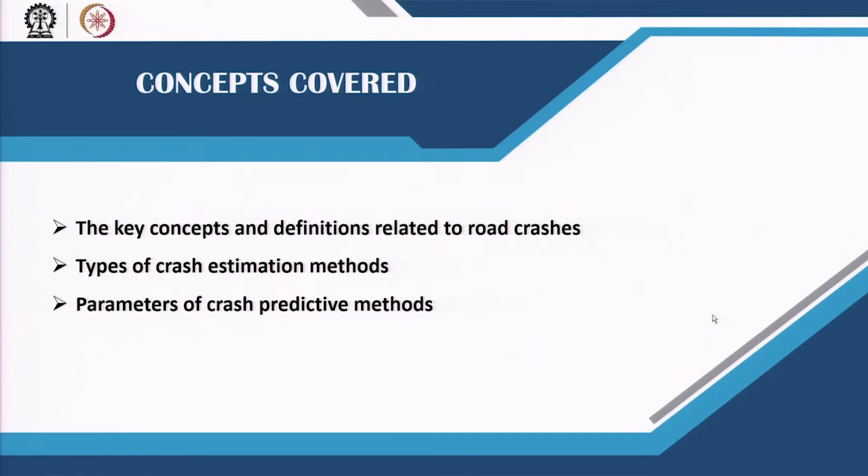Welcome back, friends. Now that we have introduced you to safety and pedestrian safety in particular, in this lecture what we are going to expose you to are the different estimation methods of road crashes in general. Then we will subsequently look at specifically pedestrian and bicycle crashes. But you have to first understand the concepts and definitions related to road crashes, how they are estimated, and what are the parameters involved in these estimation methods.

So, you would now notice that in most of the transportation safety literature, we are using the word crash rather than accident, because more and more research is showing that all of these accidents may not be an accident. For example, the meaning of the word accident in English means that it happened suddenly or without anybody's or anything's intervention. But what we are noticing is that many of these accidents can be predicted, and if they can be predicted, that means they can be avoided or stopped as well. So, hence this word crash seems to be a better fit.

So, when we say crash, what we mean is a set of events that result in injury or property damage due to collision of at least one motorized vehicle, and may involve collision with another motorized vehicle, a bicyclist, a pedestrian, or an object. Okay. So, a crash in totality does not always necessarily lead to a fatality or a death. It may be just a property damage kind of crash. It may involve multiple vehicles or just one vehicle crashing with an object on the road, or it may be a vehicle crashing with either a pedestrian or a bicyclist. So, everything inclusive of all of these terminologies is what is a crash.

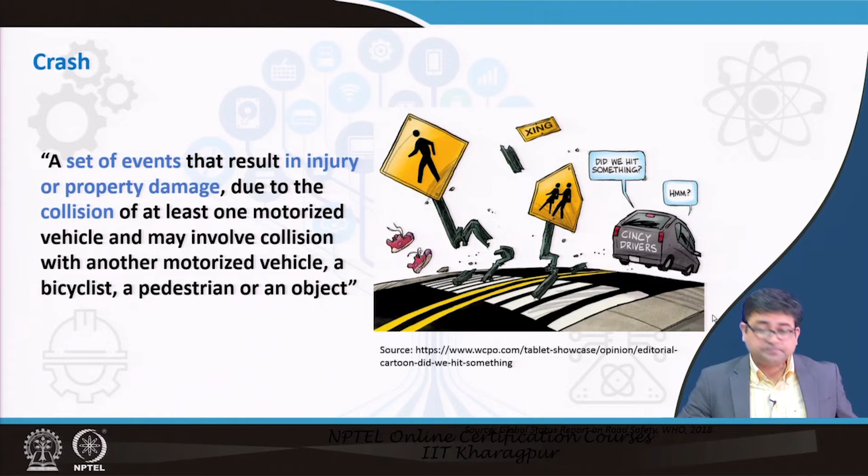So, when we want to estimate a crash, one way to know about a crash or an accident is after the fact that the accident happens. Now, that is a very reactive way of understanding or knowing where the crash has happened. But if you had to predict a crash, or estimate that this roadway is likely to have n number of crashes in the next month or in the next year, then it's almost a proactive measure, and you can then make some interventions so that these crashes can be prevented. So, that is why it is very important in today's transportation arena to estimate the crashes.

So, when we say estimate of crashes, what we are usually trying to do is develop different methodologies to predict crash frequency, how frequently a crash can occur. So, it can be on an existing roadway for existing conditions during the past or in the future. So, if you already have data about the number of accidents or crashes in the past, then for that particular type of roadway, you can say, for example, on state highways in such and such state and in this district there were n number of crashes per year. So, that is kind of a crash frequency. It is a very easy to understand, simple terminology of what a crash frequency is in the past. But can you use the same trend and predict that the crash frequency will be the same in the future or not? That is something we will tell you how to do.

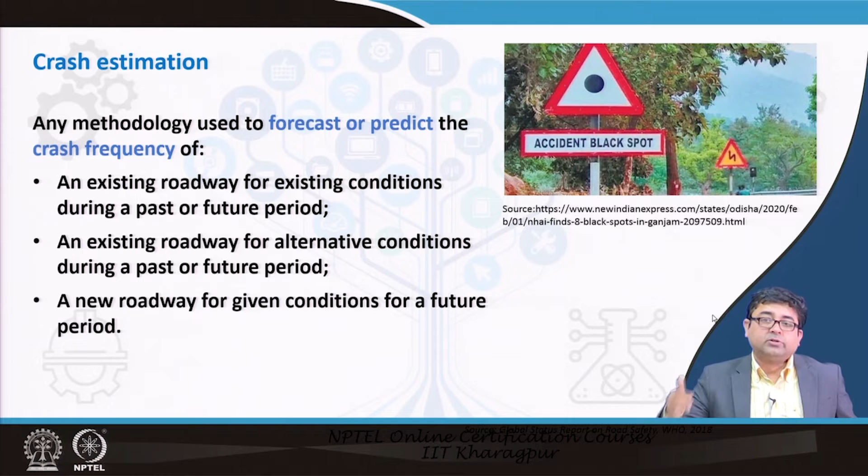Okay. So, it can be for an existing roadway, it can be for an existing roadway for alternative conditions. Maybe different conditions cause different crash frequencies, or it could be for a totally new roadway as well. A new roadway is being built between 2 points. So, what is the probability or prediction of how many crashes will occur there or how frequently they will occur? That is also something that has to be taken into account. This is the best time to take into account the crash frequencies for a new roadway, because vehicles have not yet started plying on that roadway, so that you can incorporate safety measures proactively so as to reduce the probability of those crashes happening.

Now, what are the different contributing factors when it comes to crashes? What you will see in this picture on the right hand side is the three different types of factors that we group them under. One are the roadway factors, the other are the vehicle factors, and then there are driver factors. This is a little bit of an old data set, and these percentages may differ as we are improving our research day by day, but overall what we have seen is the crashes may occur due to different driver related factors, different roadway related factors, and different vehicle related factors.

So, driver related or human factors include age, judgment, driver skill, attention, fatigue, whereas vehicle related factors include the design of the vehicle, the maintenance of the vehicle, the manufacturer, what type of vehicle it is. And the roadway or the environment include the geometric alignment, cross section, traffic control devices, meaning signalized or unsignalized intersections, the surface friction, grade, weather, visibility and all. So, these are broadly all of the different types of factors that contribute to crashes on a facility, on a highway or an urban road.

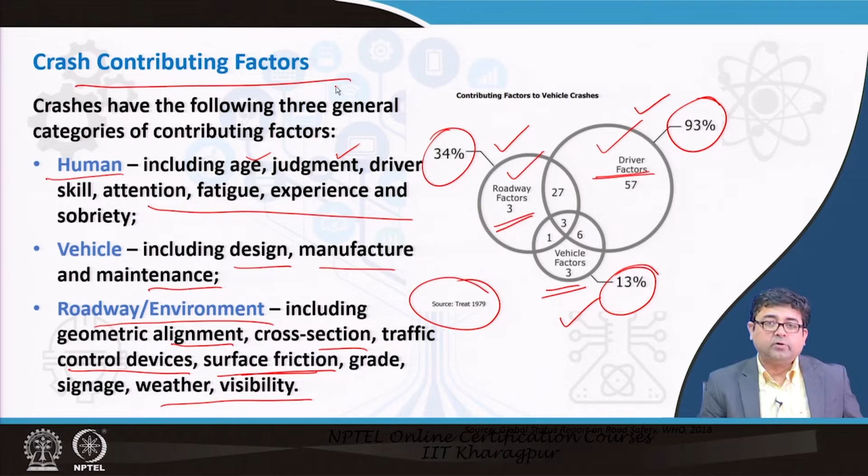The other important thing to understand is this whole idea of objective and subjective safety. Objectively is something that can be quantified. So, when we look at objective safety, essentially what we are trying to do is find out what is the number of crashes or the crash frequency and how can we reduce that. Whereas, there is a totally different arena of what is called subjective safety. That is the perception of how a person feels safe on the transportation system. This may vary based on the different types of users, vary from location to location, but nonetheless is becoming a very important aspect when we talk about transportation safety.

For example, if you do a physical improvement on a roadway, what do you expect? You expect that because of that improvement, your crashes were maybe here and it has now led to fewer number of crashes. It has gone from here to here, and also at the same time the subjective safety. So, people were feeling less safe here, now they are feeling more safe. So, when you take a physical measure to improve safety, it should affect both the objective safety as well as the subjective safety.

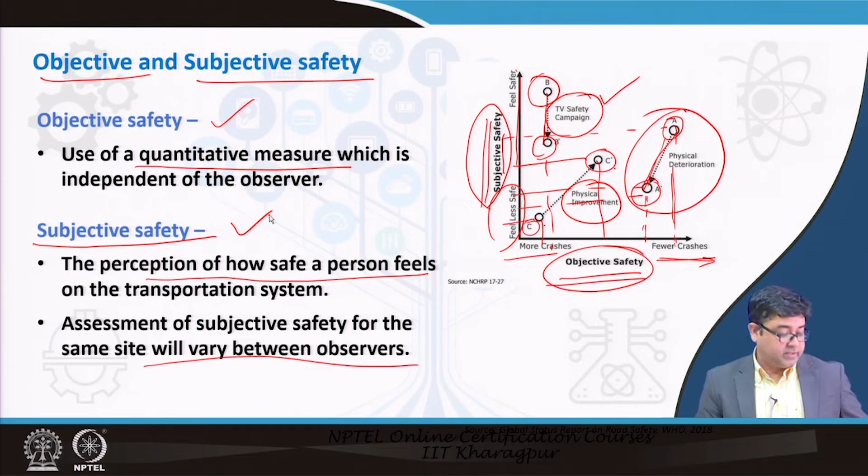So, different measures give different types of objective and subjective safety implications. So, you have to not only look at the objective safety, but at the same time you have to look at the subjective safety of your highway or facility in your area.

Then different descriptive measures have been developed over the years, which give you an idea about the number of crashes or the frequency of crashes that are happening. For example, you may decide that you want to know the number of accidents as a result of the different types of intersections in your area. It may be at a mid block intersection, a Y intersection, a T intersection, a roundabout, a 4-legged or even 5-legged junction. So, you can divide it up in that way and understand the safety implications at different types of intersections in your city.

So, the different parameters that are involved in understanding road safety may include just purely the number of people that have died at each of these, or the percentage of deaths, or the number of injuries. Remember, all crashes do not lead to death. There may be a lot of crashes that lead to minor injuries, major injuries, and then maybe they lead to death. Okay. So, you may want to know either the total number or the percentage, or just the total number of crashes, or you want to divide it up into different types of injuries, minor injury, mean of the injuries or mean of the deaths.

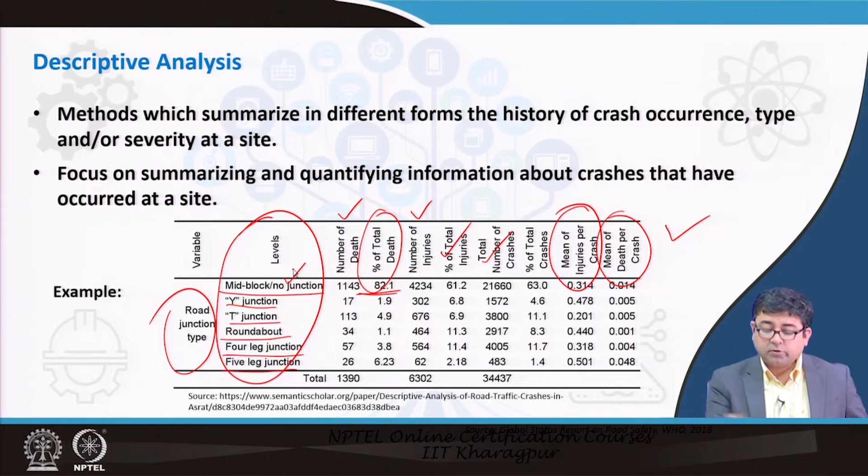These are all done so that the measure that you implement to improve it should be very, very specific. So, in this type of situation, possibly the mid block section is the most vulnerable section. So, you have to improve the safety of the pedestrians crossing at mid block, for example. So, what type of intervention do you put? You should not go for an intervention that is more effective at a signalized intersection; you have to think of something that is more practical for a mid block section. So, that is the reason why you develop all different types of descriptive statistics.

You also have to know quantitatively how well to predict, right. Prediction always has a lot of errors. When you are trying to predict anything, you need essentially a lot of input values. The better and more precise the input values, the better will be your prediction. So, a system that we are moving towards is to capture all incidents or all crashes that happen at a roadway and write down the parameters then and there.

So, when an accident happens, not only the police arrives, maybe the ambulance arrives at that spot. We are also trying to have an engineer arrive at the spot along with them, so that the engineer can help point out some deficiencies in the roadway design or the intersection design or whatever it is, so that all the parameters are captured at the time of the crash. By collecting all those parameters, you can hope to develop a predictive model which will give you better results. So, it is very, very important for us to do such accident investigation right at the spot, with different types of people there: not only the ambulance, not only the police, but also engineers on the spot, so that they can verify the different parameters that were involved in that particular crash.

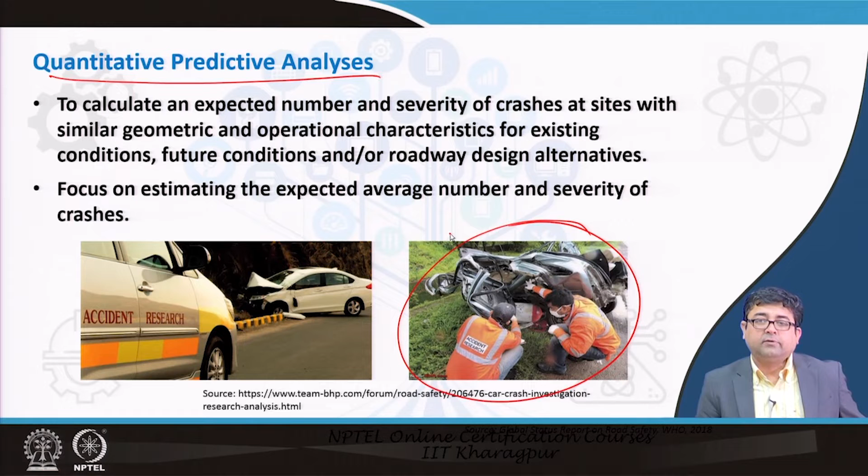Now, how have the different crash estimation methods evolved? We have already talked about crash frequency. The other thing that people now look at rather than just crash frequency is something called a crash rate, which tells you how many crashes are happening per n number of miles of vehicles driven on that road. The point is, the more vehicles, the higher the likelihood that the number of crashes will increase. So, it is not just how many accidents are happening per year or per month, it is also how many vehicles are being driven on that road. That is what is called crash rate.

And then there are of course a lot of indirect safety measures known as surrogate measures that have been developed. Surrogate measures mean, for example, if you do not wear a helmet on a two-wheeler, you are more likely to be involved in an injury or fatality related crash. So, now people are trying to relate wearing a helmet, or wearing a seat belt when you are in a car, to the probability of you being involved in a major crash or a major injury crash.

Different types of crashes can be categorized. When you do not have good information or direct, first-hand data on accidents for a roadway segment, what you usually do is try to predict an accident using different types of indirect measures. These indirect measures are called surrogate measures.

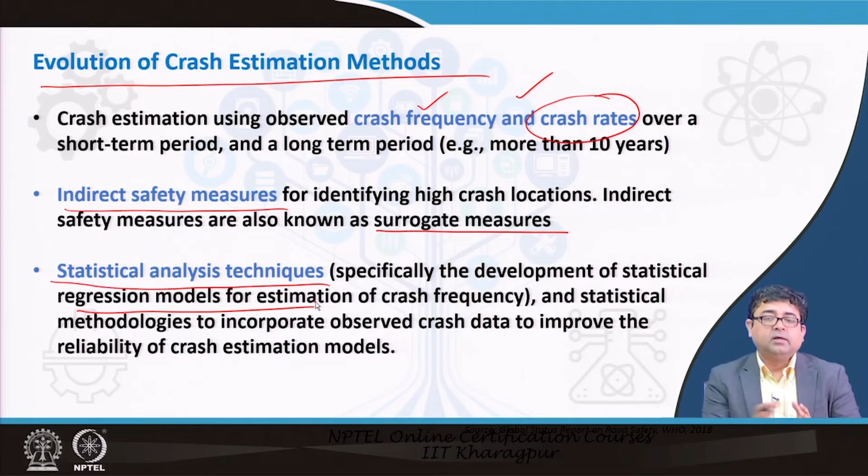Then there are statistical techniques which look at what is the best model that fits the existing number of accidents. Usually people see whether regression models can estimate crash frequency, or whether Poisson models or negative binomial models fit the crash frequency that is happening. Those are all statistical tools, and if the model fit is very good, they can also help in predicting future crashes.

Crash frequency or crash rates are often used for crash estimation and evaluation. They are very simplistic. For example, you may often see such statistics in newspapers, digital media, or on TV, showing the number of accidents that have happened per city per year and how they rank.

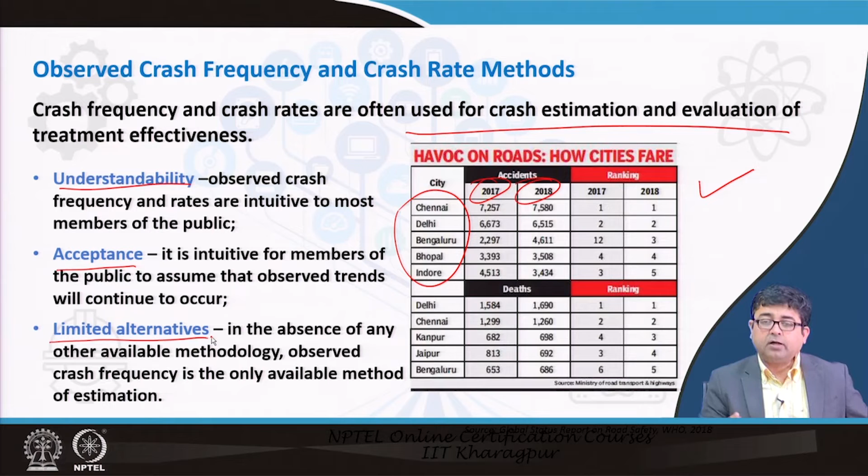These are easy to understand, and since these crashes have already happened, the validity and acceptance of these numbers is high. People do believe in these numbers, but it does not provide a means of predicting crashes. It is just a very reactive method, knowing about the crash after it has happened. That is a very old way of trying to deal with reducing the number of crashes. It does not give you alternatives or different methods of prediction.

If you look at each of these methods, crash frequency is simply the number of crashes divided by the period, in years or months or whatever you are looking at. Crash rate is a better measure than crash frequency. It expresses crashes per 100 million vehicle miles traveled. The more vehicle miles (VMT or VKT) traveled on the road, the higher the number of crashes is likely to be. So you take the number of crashes times 100 million, divided by the volume on that road, the number of years, and the total length of the segment you are looking at. That is essentially how you determine the crash rate.

Consider a simple problem: road segment A is a 3-mile section with 4 crashes over 5 years and a traffic volume of 4,000 vehicles per day. Segment B is also a 3-mile section, but has had 10 crashes over 5 years and a traffic volume of 12,000 vehicles per day. If you determine crash frequency and crash rate, which is the worse segment and which is the better one? You want to compare these two segments to see which is worse, and then prioritize. Usually you want to help both segments, but if you must prioritize, you would pick which one to improve.

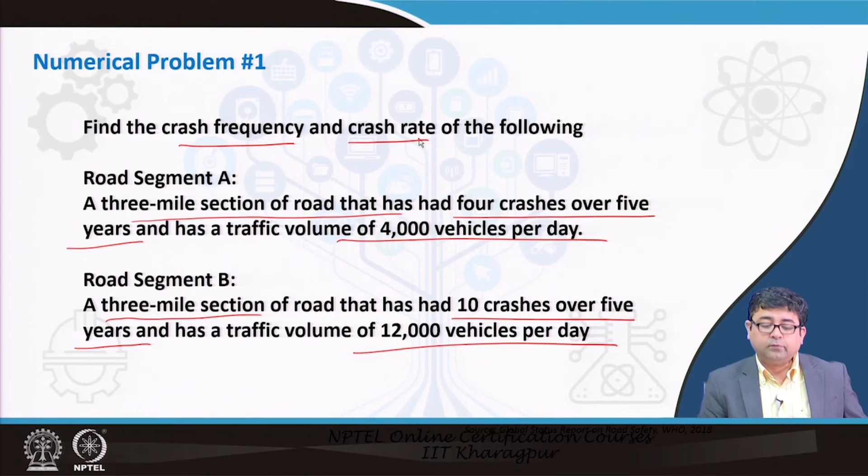If you purely looked at crash frequency, segment A has 4 crashes in 5 years, giving 0.8, whereas segment B has 10 crashes in 5 years, giving 2. So you would think segment B is the worse segment.

However, if you look at the crash rate, which depends on how many vehicles travel on that road, segment A has a crash rate of 18.2 crashes per 100 million vehicle miles traveled, whereas segment B has only 15.2 per 100 million vehicle miles traveled. This suggests segment A is actually the more serious situation and needs more focus, because its crash rate is higher even though its crash frequency is lower. That's why more and more people are looking at crash rates rather than just crash frequency.

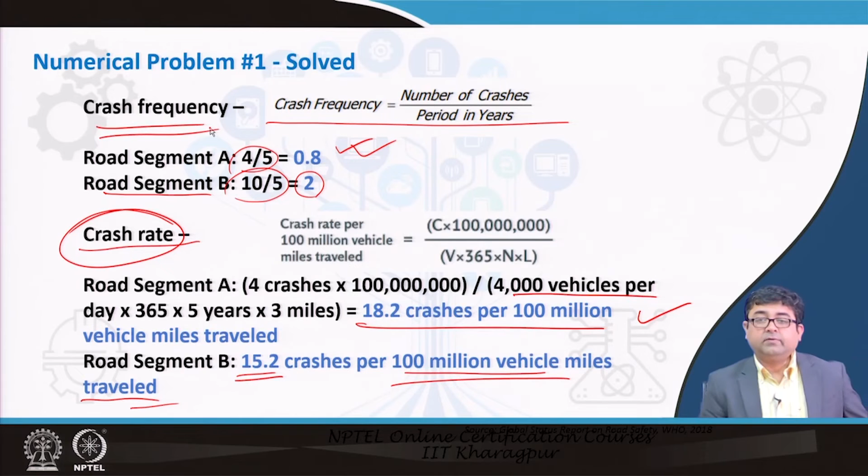What are the indirect means of understanding safety? Like we said, the surrogate methodology is used primarily because maybe a road or facility is not yet in service, so it is a road that is just being built. So you do not have any previous data on the road. So how can you predict what the crashes will be on that road, or it has been only just opened for the last few months or weeks. So you do not have a lot of data on it. So how can you then predict, or maybe crash frequencies are low. Frequencies are low, however, people are complaining that there are a lot of accidents leading to fatalities maybe. So you do not know how to deal with it.

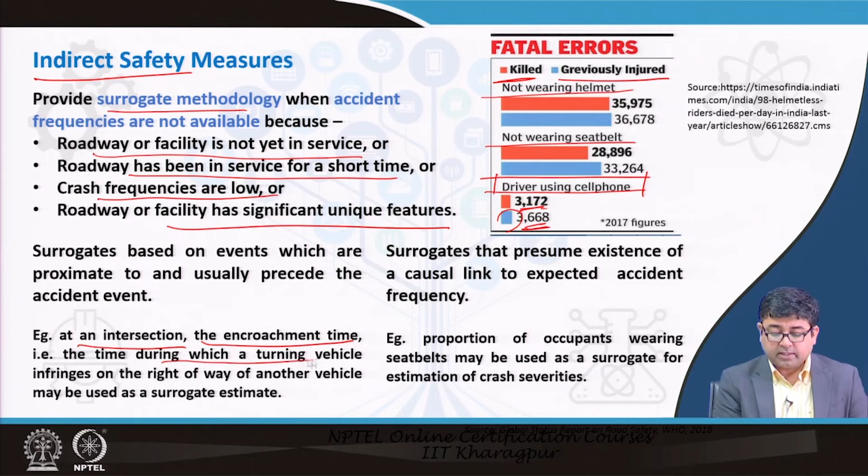For example, at an intersection, the encroachment time, that is the time during which a turning vehicle infringes on the right of way of another vehicle, can be used as a surrogate estimate. For example, if you have free left turns at many intersections.

So the free left turn time and the through vehicle is coming on the main road, there is a possibility that these two vehicles may collide. Or during the free left turn maybe a pedestrian is trying to cross that road, so they may interact or collide with each other. So the encroachment time may be seen as a surrogate measure for safety at an intersection, and we have already talked about wearing seat belts or not wearing helmets being a surrogate measure.

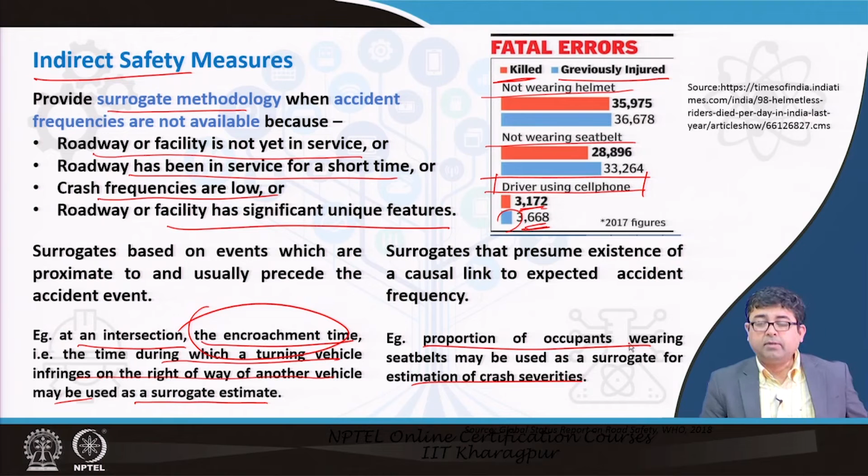When we start looking at the statistical method, we have already told you that these may be either simple regression equations, or they may also be Poisson or negative binomial.

People tend to look at negative binomial and Poisson because usually when we look at the number of crashes that happen on one roadway, for example over a year or two years, they are usually termed as rare events. I mean, rare events as in you would see a lot of accidents happening, but in terms of count, if you count each crash as an event, over 365 days you may find only 50 accidents have happened. So 50 out of 365 days seems like a rare event. That is why some researchers are modeling crashes as rare events.

However, it is imperative that these statistical models have a good fit, otherwise they may not be able to predict future crashes very accurately, and calibration to local data is very important. So once you have your statistical model, you have to calibrate it, because maybe the model was developed in another city, another town, another country. You have to calibrate it to local conditions, then validate it with the actual number of accidents that have happened. Only then can statistical models be used with confidence.

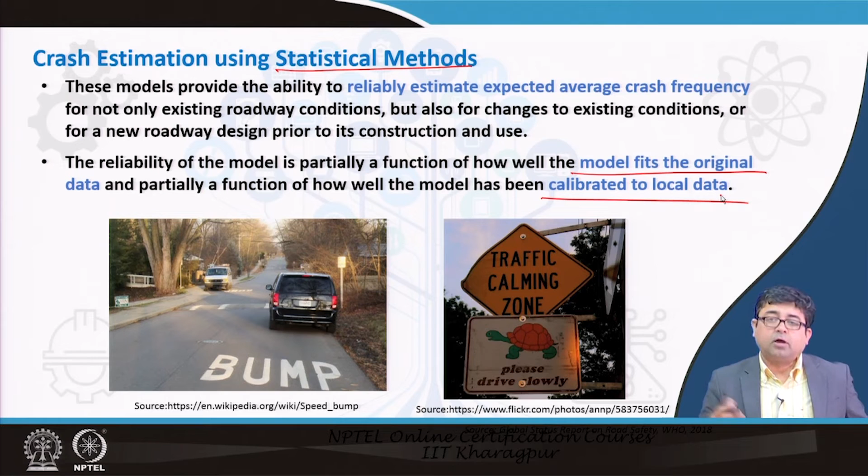So, in these predictive models, what people use in general are what are called safety performance functions.

If you are really a person working in the transportation safety arena, then you will be dealing with a lot of these safety performance functions, or SPFs. These are statistical base models used to estimate average crash frequency for a particular facility with specified base conditions. These are equations, most likely regression equations, sometimes exponential equations, that have been developed for a certain base condition. If you take that to another condition, you have to calibrate it to those conditions and then use it to predict. So, these are what safety performance functions are.

Accident modification factors, or AMFs, are the ratio of the effectiveness of one condition in comparison to another condition. So now you have developed a countermeasure, maybe implemented a countermeasure to improve safety. What is the modification factor as a result of implementing that safety measure? Maybe you have increased police patrolling. As a result of increased police patrolling on that roadway, how have accidents changed? The ratio of before and after gives you the actual modification factor. Then somebody else in some other neighborhood or city can also think that if I have more police patrolling this roadway, maybe my accidents will also go down. So, those are called accident modification factors.

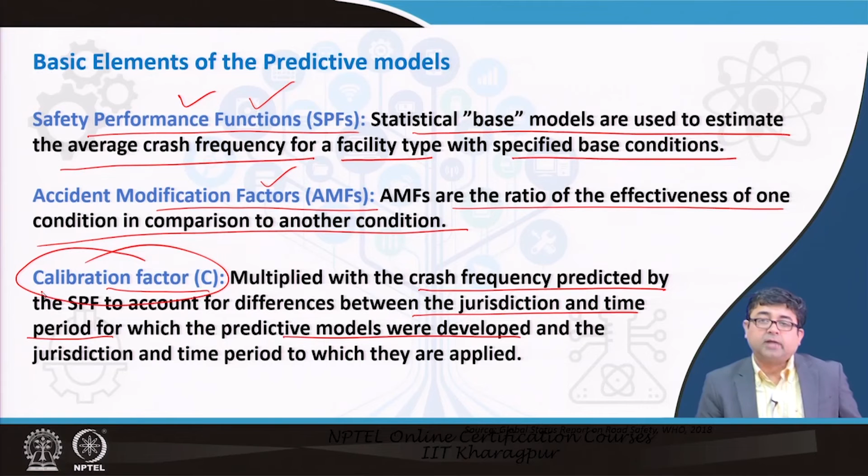Finally, the calibration factors are multiplied with the crash frequency predicted by the SPF to account for differences between the jurisdiction and the time period for which they were developed. Maybe this was developed 5 years ago for a different city, however now you want to use it 5 years later for a different city. So you have to calibrate it to your area, to your time period. All those calibrations are involved in this.

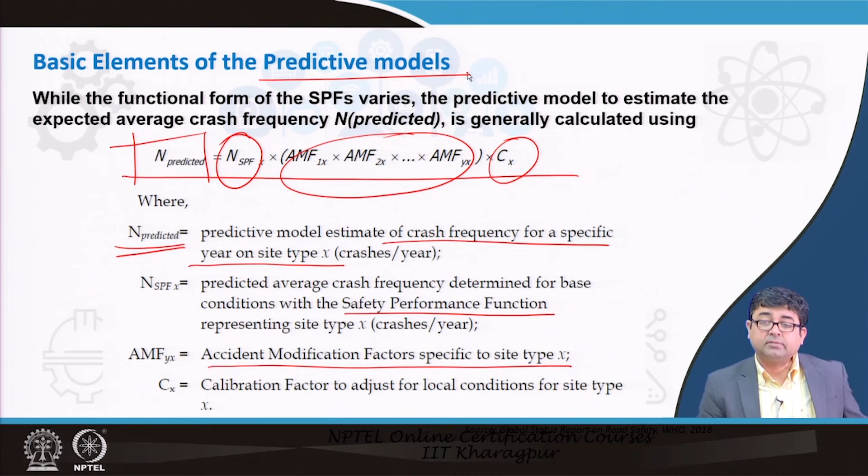Usually, this is how you will see a predictive statistical model. So, n predicted, or the crash frequency for a specific year on a specific facility type, will be given by your SPF function, safety performance function, which is then multiplied by your accident modification factors and also your calibration factor. This is a basic gross level model. If you are trying to develop a predictive model for your area, it will have all of these elements, but different factors will apply for your case. The value of calibration may be less or may be high. But basically, this is how your model should look like.

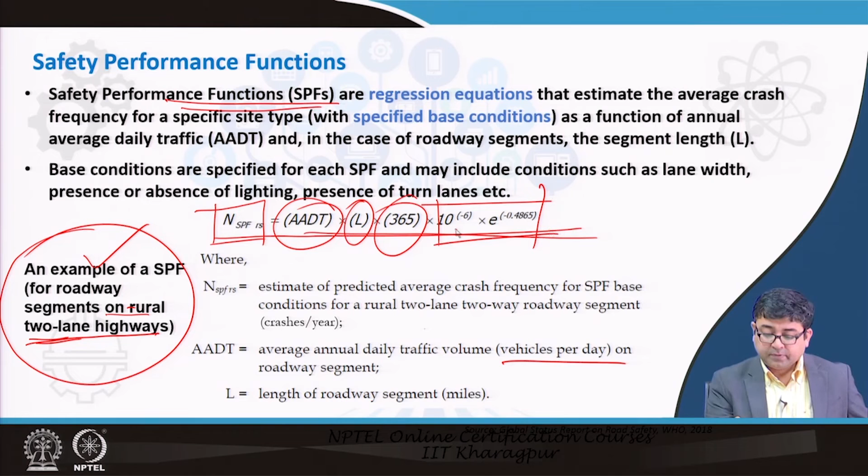If you are looking at developing these safety performance functions, they will look something like this. For example, a safety performance function for a roadway segment on rural 2-lane highways. This is as specific as that - it has to be for a particular type of facility. So if you have to develop an SPF for a 2-lane rural highway, maybe this will look like this. It has the vehicles per day, AADT, your length of stretch, for all 365 days, and these have been developed based on all the data that has been collected. It looks like some form of an exponential function that you are using to predict the average crash frequency for the base conditions - this is for base conditions for rural 2-lane roadways.

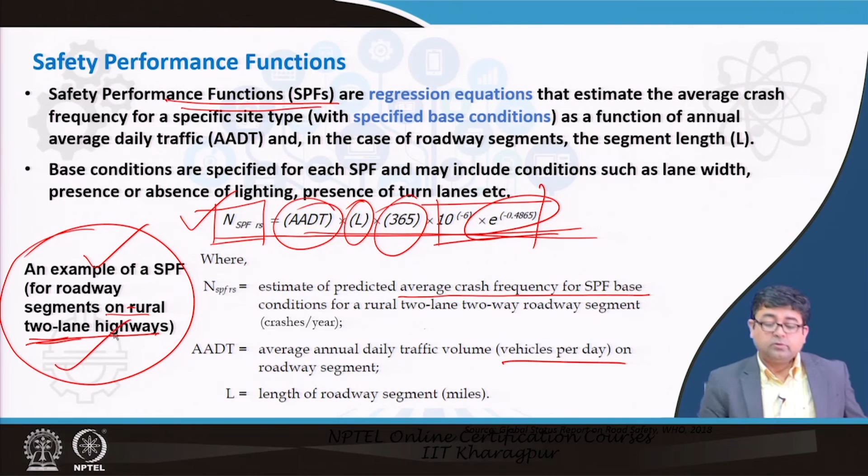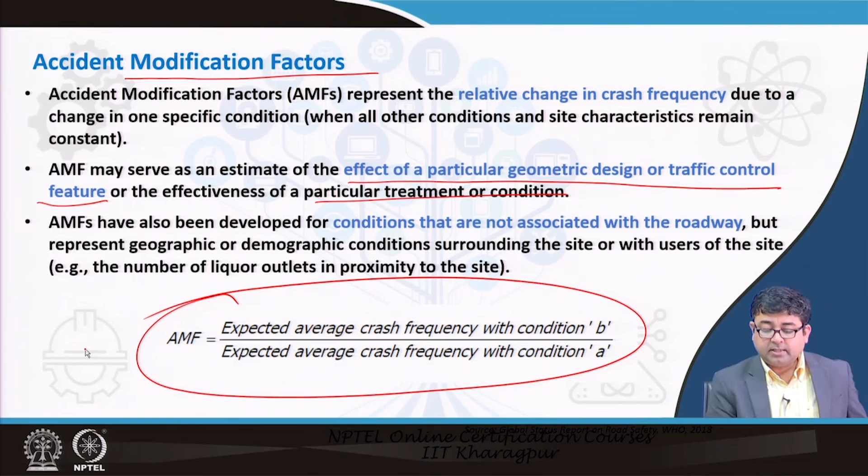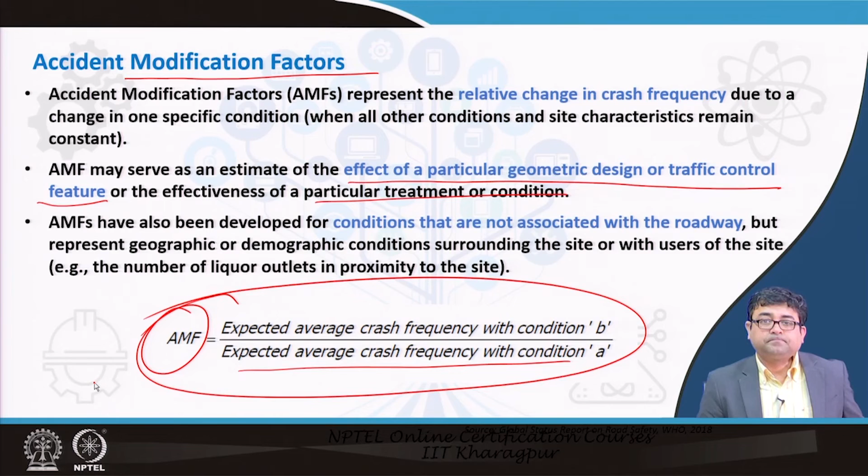Now, like we said, those are all for base conditions. If you have to improve those conditions and you have taken certain strategies, maybe you have to estimate the effect of a particular geometric design or traffic control feature or the effectiveness of the particular treatment. So essentially you have to have accident modification factors - that is the expected average crash frequency with condition B, the improved condition, divided by the expected average crash frequency with condition A. That will give you how effective your implementation was on that roadway. Simple example,

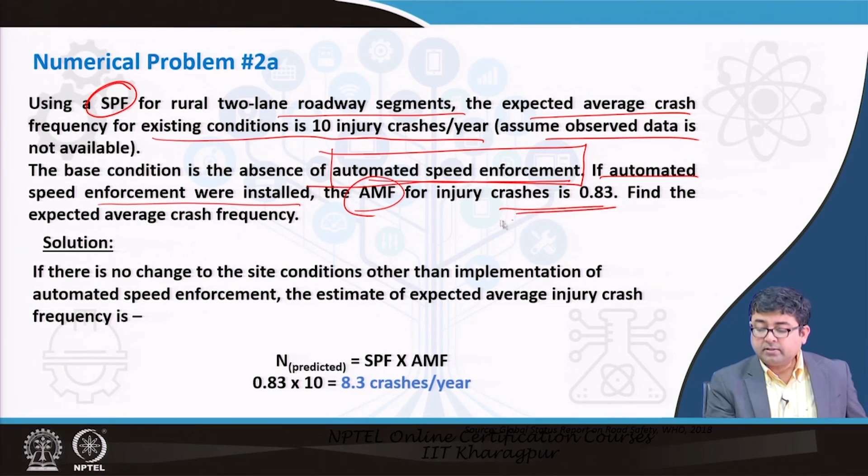Using an SPF for 2-lane roadways, the expected average crash frequency of existing conditions is 10 injury crashes per year. Assume observed data is not available - this is just using an SPF. The base condition is in the absence of automated speed enforcement. So these are base conditions where automated speed enforcement was not available. However, if automated speed enforcement was installed, the AMF for injury crashes is 0.83. So what is the average crash frequency that you can expect? You just have to use the formula which will give you the expected or predicted average crash frequency. You know your SPF is 10 and you know your accident modification factor for this kind of intervention.

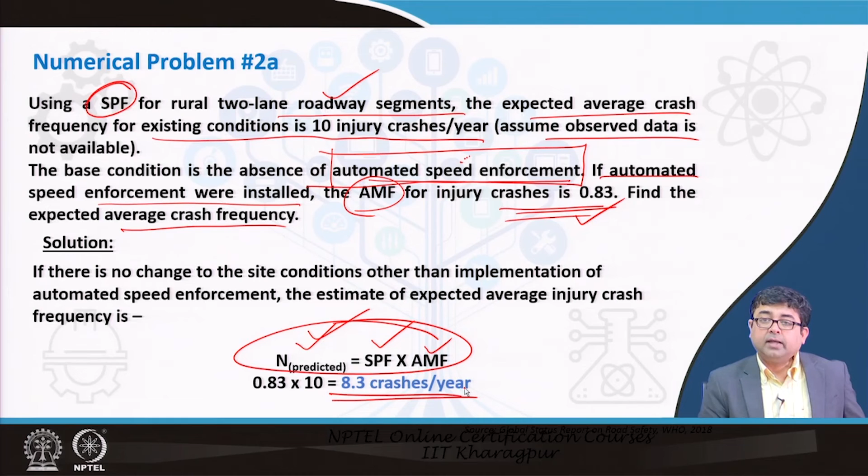This is the kind of intervention for which an accident modification factor of 0.83 is used. So now you can expect that there will be 8.3 crashes per year, down from 10 crashes per year. So that is very simple.

Similarly, if there is a treatment X which consists of providing a left turn lane on both major road approaches to an urban four-legged signalized intersection, and treatment Y is permitting left turn on red maneuvers, so you have free left turns that you can do. Both of these treatments are to be implemented, and it is assumed that their effects are independent of each other. So if both of them are implemented, what will happen, given that their effects are independent?

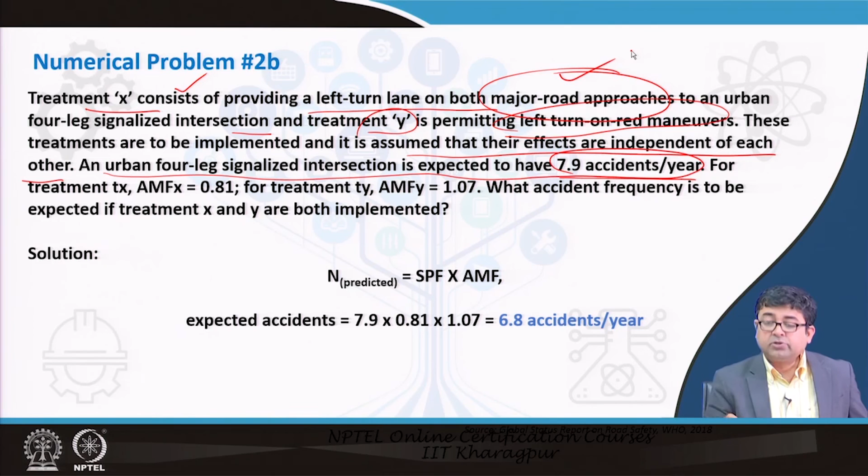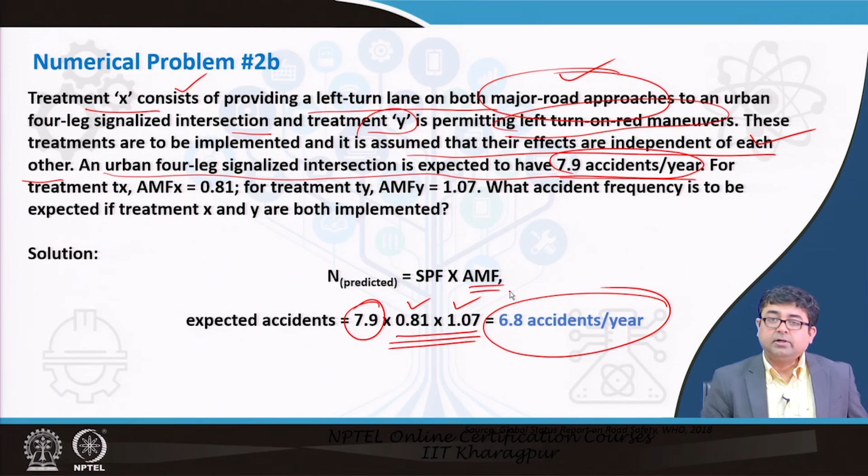An urban four-legged signalized intersection is expected to have, as seen from other data, 7.9 accidents a year, but at your location you have implemented these two treatments. So how much do you expect it to change by? This is the base condition, and you have these two accident modification factors. Since they are independent of each other, you can multiply both of them, and you can see that your accidents might reduce to 6.8 accidents per year. So that is a very simple understanding of how to carry out the statistical modeling.

Calibration, the last thing in understanding how to predict crash frequencies, is a process of adjusting the SPFs to reflect different crash frequencies of different jurisdictions. Calibration can be undertaken for a single state, or where appropriate, for different geographical areas within the state as well. It accounts for factors such as climate, driver population, animal population, accident reporting thresholds, and accident reporting system procedures. All of these may vary from place to place.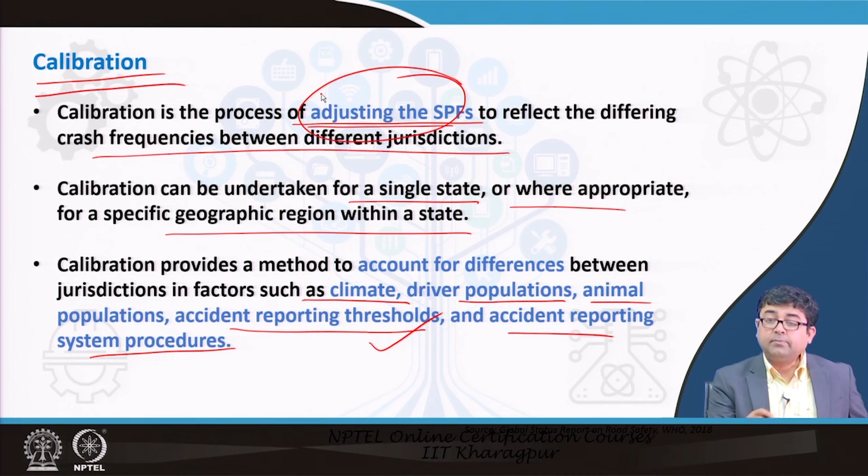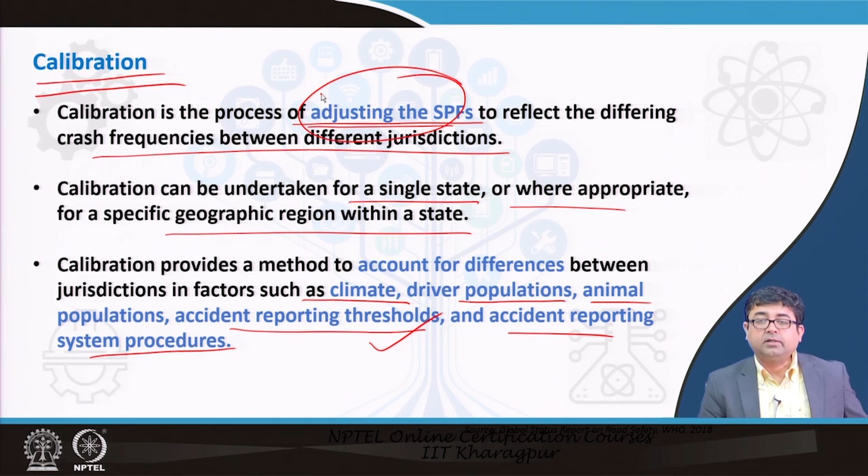So in order to take into account all of these, you have to adjust your safety performance functions, your SPFs. Only then can you use it for your jurisdiction. So accident modification factors are interventions that you take, whereas calibration is calibrating to your jurisdiction. You have not implemented anything yet, but because the SPF was developed for a different jurisdiction, you have to bring it to your jurisdiction. So you have to calibrate that function, that equation, or that model to your jurisdiction. That is kind of what calibration is.

Simply, the calibration factor is the summation of all observed crashes divided by the summation of all predicted crashes. So once you identify the facility type, select sites for calibration, obtain data for each facility for the specific calibration period, then you apply your predictive model to predict the crash frequency. Once you get the crash frequency, you also know what the observed crashes are in your area. So while you are calibrating, you are not yet predicting it, you are calibrating so that your model should be as close as possible to the actual crashes that have happened.

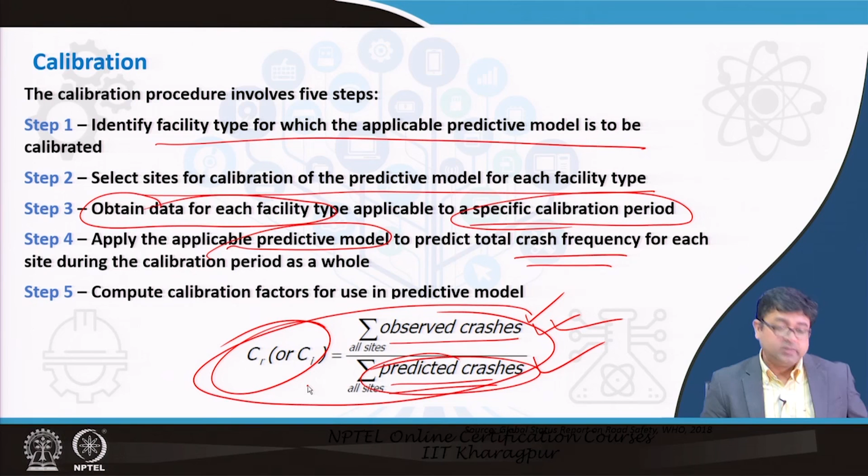Once this value is very close to 1, then you would say that your observed and predicted crashes are very close to each other. Your equations, or your model, are predicting the crashes very well. So then your calibration factor is almost close to 1.

That is the end of this lecture. Most of the materials here have been taken from the Highway Safety Manual developed by AASHTO in 2010 in the USA. This is a very good resource when you are talking about safety in the highway arena, in the transportation arena. So I recommend that you guys go through this manual very carefully.

In conclusion, we have introduced all the different types of crashes and how they occur. They are very random and rare, so it is very important to have prediction tools, so that you can then implement certain safety measures in order to reduce the occurrence of these crashes.

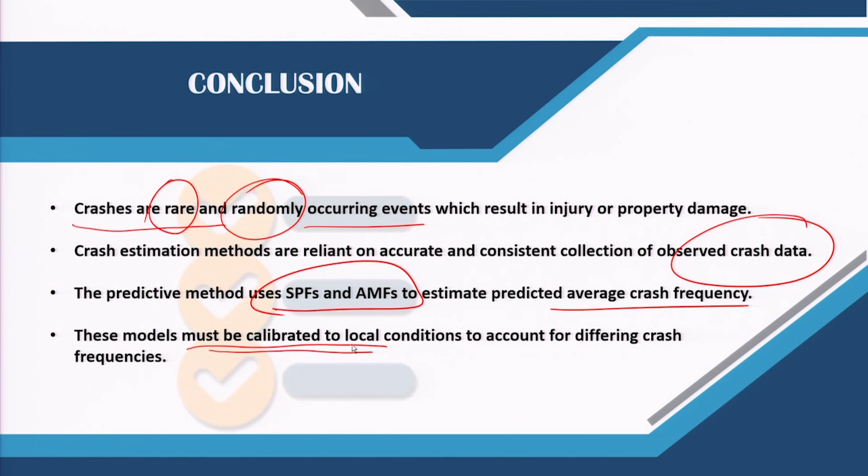We have introduced you to different types of safety performance functions and accident modification factors that allow you to use statistical tools in order to predict the average crash frequency in your area. We have told you how to determine crash rates, and finally, it is very important to know that these safety performance functions have to be calibrated to local conditions in order to account for different crash frequencies. Thank you.